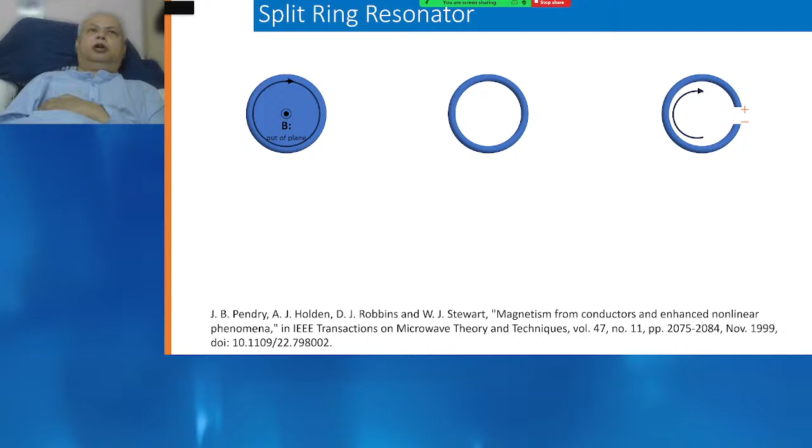Consider a conducting disk and apply a magnetic field out of plane from the disk. So the disk has a plane, and perpendicular to that plane is the applied magnetic field. If we apply a magnetic field in that direction, it will induce a circular current. Why? Because according to Lenz's law, the magnetic field will be opposed by this disk, by this conductor.

So it will oppose the external magnetic field, and there will be an induced circular current. Now this disk being a conductor, the current will be mostly at its edge, the outer side. The current does not penetrate into the conductor, so it is mostly on the outer side, the edge. Now this is basically a diamagnetic effect which is very weak, so it is weakly diamagnetic, mu is less than 1.

So this is not going to solve our purpose, but we'll develop on this next. Now, since current is on the outside, there is no point using the other portions of the metal or conductor, which will lead to higher conductor loss. So remove those portions where there is no current. Remove those portions, and effectively we get a ring confining the current. So we get a ring from the disk, at the edge of the current in the disk, which gives the same or similar response to the disk.

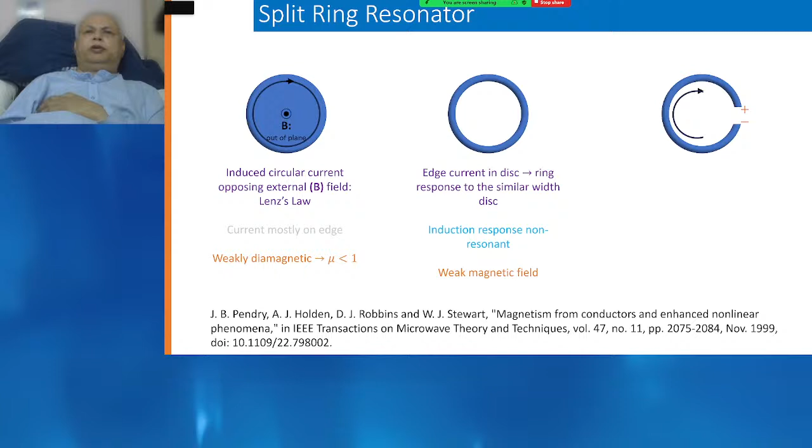Now here also the induction response is non-resonant. Since there is only an induction response, there cannot be any resonance. Again, it's a weak magnetic field.

Now to get resonance, we have to have a capacitive effect. So what we will do is cut the ring, make a small cut, not a large cut, a small cut. If we make a small cut, then across the cut there will be charges, positive on one side and negative on the other side. Therefore, there will be capacitance. If it is a large cut, then the capacitance will be small or negligible.

Why? Because C is equal to epsilon A by D. If you increase D, the cut size, C will be smaller, so that will be negligible. So make a small cut, so we get sufficient capacitance. The split introduces capacitance, and the metal, as usual, gives us the inductance. So we have inductance and capacitance, which means an LC circuit. The LC makes it resonant, with the resonant frequency omega 0 equal to 1 upon root over LC.

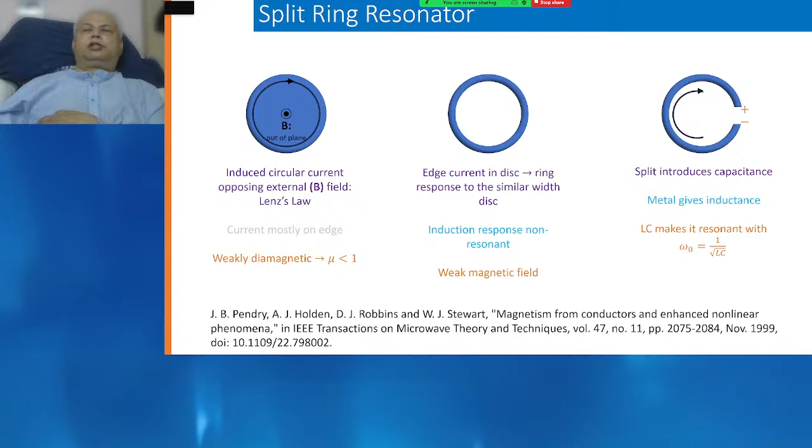Now on the left side, there is a problem. At the cut, we have a plus and minus charge separated by a small distance, acting like a dipole, like an antenna. The moment it acts like a strong dipole antenna, it will dominate and lose the magnetic response to a large extent. So that is to be taken care of.

To take care of that, we use another split ring in the opposite direction. The split is opposite to the split of the outer ring. So there are two dipoles on two rings, but in opposite directions, so the charge distribution is different. In the outer one, the upper side is positive; in the inner one, the upper side is negative. Since the charge distribution is different, they cancel out, and the antenna effect is cancelled.

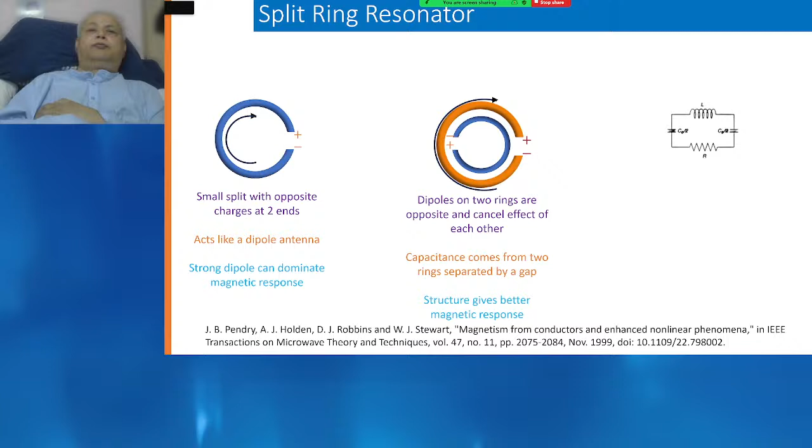Second point: there are two capacitances, coming from the two rings separated by a gap. This gives a better magnetic response. Ultimately, we arrive at this configuration which gives us better magnetic response.

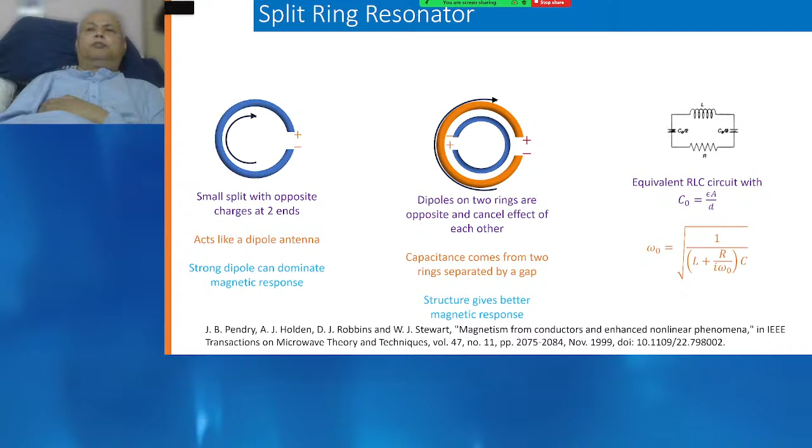If we look at the equivalent circuit, we have L, then two capacitances, then R, because we are using a conductor which has resistance. So we have an equivalent RLC circuit for which omega 0 will be the root over of 1 upon L plus R by j omega into C. So accordingly you can find that.

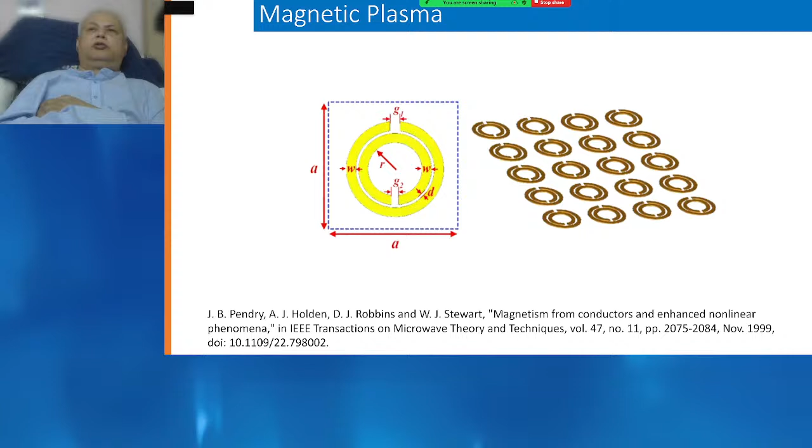Now that can be arranged in periodic fashion to get magnetic plasma. So now we get magnetic plasma by arranging them periodically, as in the case of the rod. You can use Lorentz law or Drude law to find out how mu will vary with frequency.

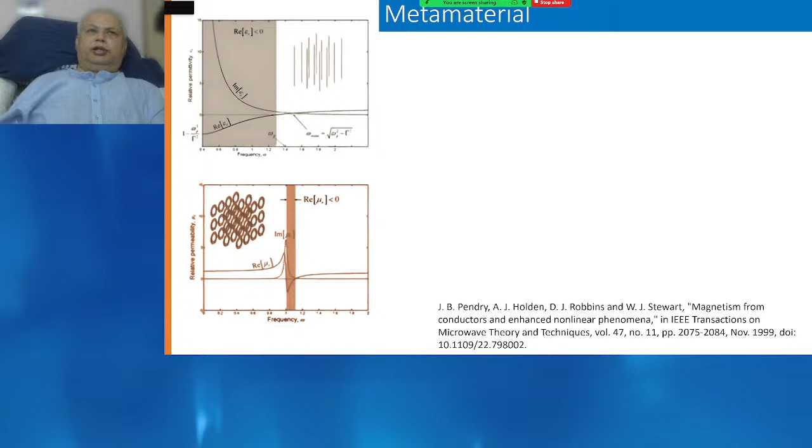Now, how to get a metamaterial? Metamaterial has mu negative and epsilon negative. So first generate the negative epsilon, then generate the negative mu. Epsilon and mu are negative over certain ranges of frequency, and there will be a band of frequency where there is an overlap of negative permittivity and negative permeability. Choose that region, and add these two. If we add them, we get a region where both are negative, epsilon negative and mu negative. There we get negative refractive index, or metamaterial. This is the practical realization of metamaterial.

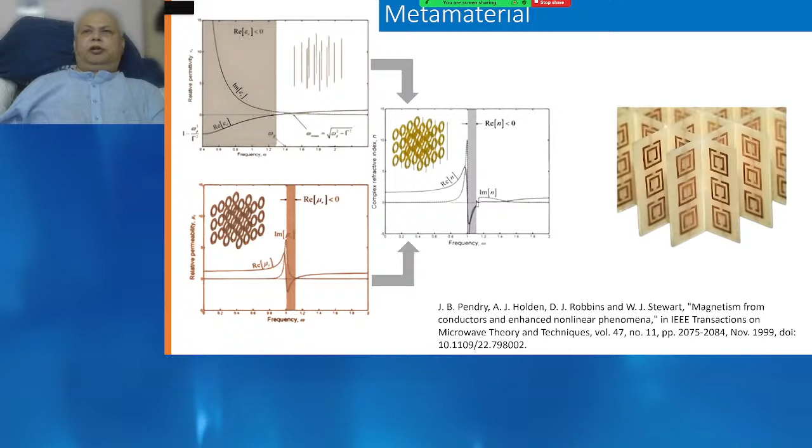Now, what are some of the applications? Because that is the main focus today. First, if you use metamaterials, the Doppler effect gets reversed, which means if the source is approaching you, instead of the frequency increasing, the frequency will decrease.

For example, suppose you are in a war and your plane is going into the enemy zone, and your plane has metamaterial on its surface. When it goes into the enemy zone, the radar will see that the plane is going away, because the frequency has decreased due to Doppler effect reversal. It will feel as if the plane is going away from the enemy zone, so it will be difficult to detect it.

Then the Goos-Hänchen effect is reversed, which means normally, the point where you incident the light or electromagnetic field is the point from which it gets reflected — that is the usual RHM phenomenon. But in this case, the reflected beam will be shifted from the point of the incident beam. From where the incident beam is incidented, from that point it will be shifted. That is called the Goos-Hänchen effect.

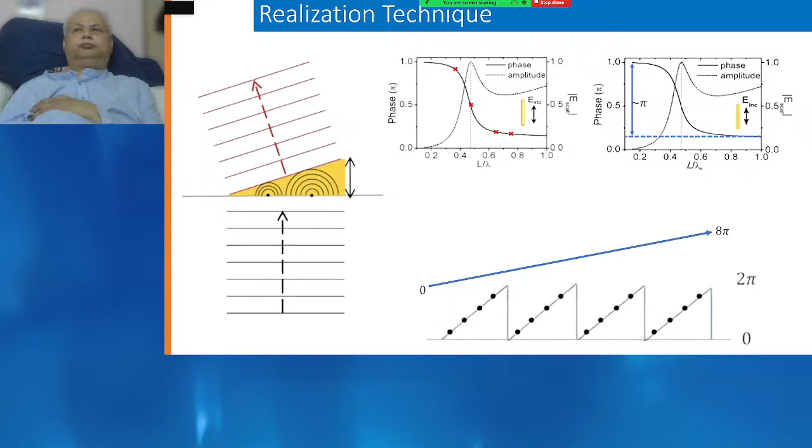Now we are going to use the principle of reflection. Some principles we should always remember regarding reflection: suppose there is a reflection between two dielectric interfaces, then the reflected beam will be either in phase or out of phase, that is 0 or pi, with the incident beam. If the first medium's dielectric constant is less than the second medium's, then the phase is pi. If the first medium's dielectric constant is more than the second medium's, then it will be 0.

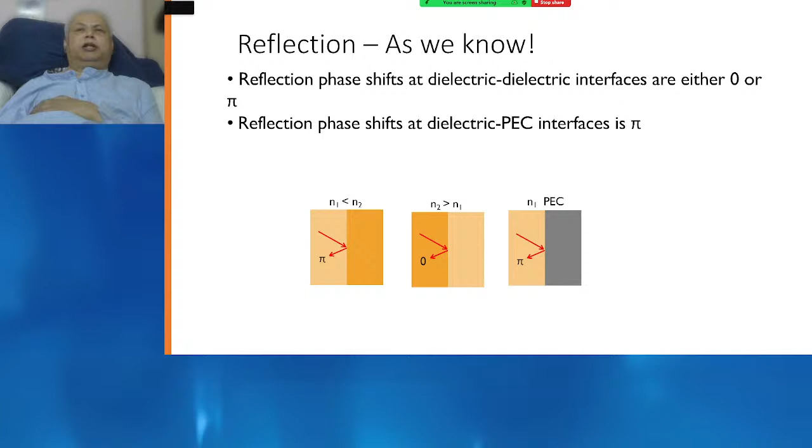But if you go to a PEC, a perfect electric conductor, the reflected phase is always pi. And in between these two cases, there are lossy materials.

In the lossy material, the reflection phase can always be anywhere between 0 to 2 pi. So if we use lossy material, which is the case we are going to use, we can realize any value between 0 to 2 pi.

If you require pure pi, what can you do? If you require pure 0, what can you do? And we have seen that between 0 to 2 pi, any value can be achieved. For that, we require lossy material.

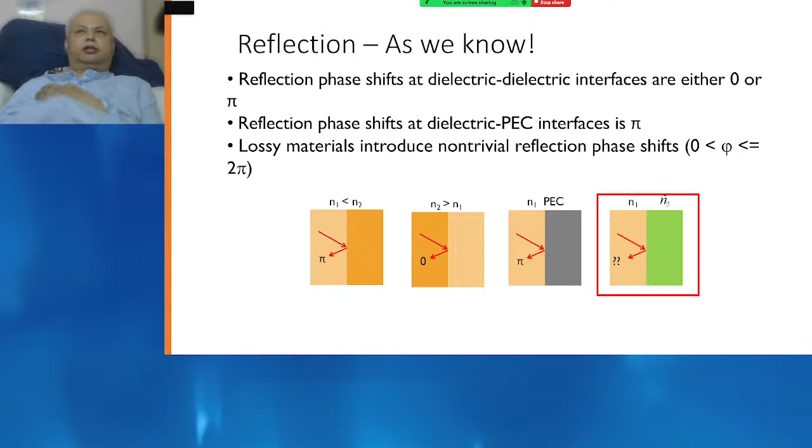Now let us remember the generalized Snell's law that we discussed yesterday. The normal Snell's law is n2 sin theta t equals n1 sin theta i, where t and i are for transmitted and incident waves. The generalized Snell's law concerns what happens at the boundary between the two dielectrics, where we have given a gradient phase. If the phase is zero, then n2 sin theta t minus n1 sin theta i equals zero, meaning the discontinuity is zero, there is no phase discontinuity.

But if there is a phase discontinuity, then this will be proportional to the phase discontinuity. The left hand side is a unitless quantity, while the right hand side is proportional to the gradient of phi, the phase gradient, but the phase gradient has a unit, so its inverse is 1 by k0. Therefore for the constant, we take 1 by k0. This gives us the generalized Snell's law.

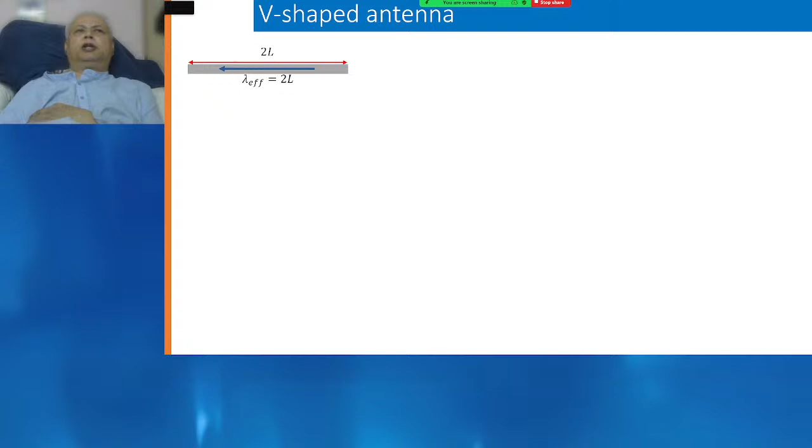We discussed this yesterday too, so let me go into slightly more detail. Suppose we want a frequency or effective length of a linear antenna, so we take the antenna effective length to be 2L, meaning lambda effective corresponds to effective length 2L. In that, on the left hand side suppose we have negative charges accumulated, and on the right hand side we have positive charges accumulated, so the arrow from positive to negative shows the electric field.

Now there can be another case where in this mode there is positive charge on both sides and negative charges as well, so from positive to negative we have the electric field, and from positive to negative is L distance. That is lambda effective, so that will be equal to L. So we have the same length, but there we can generate two frequencies or two wavelengths.

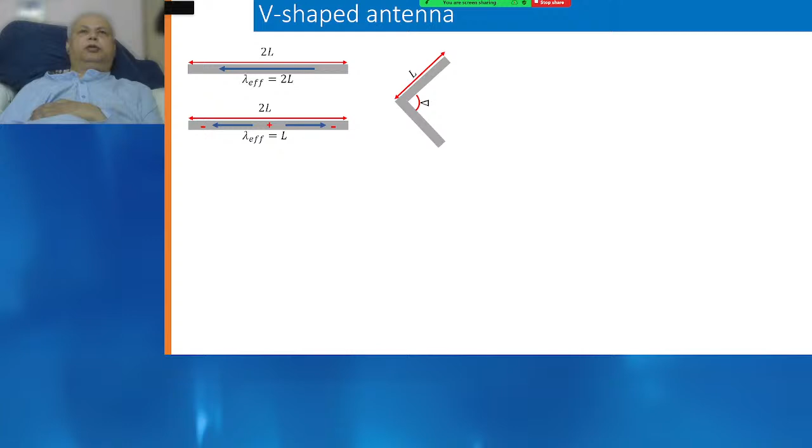Now to realize this in the form of an antenna, what we usually do is fold it from the center. So take the 2L length, then fold it from the center, and you get a V-shaped antenna. That is what we discussed yesterday about the V-shaped antenna.

This part we discussed yesterday, so I am leaving it out except this next portion. Electric field, what will be symmetric, what will be vertical, that we have discussed. This I have discussed next.

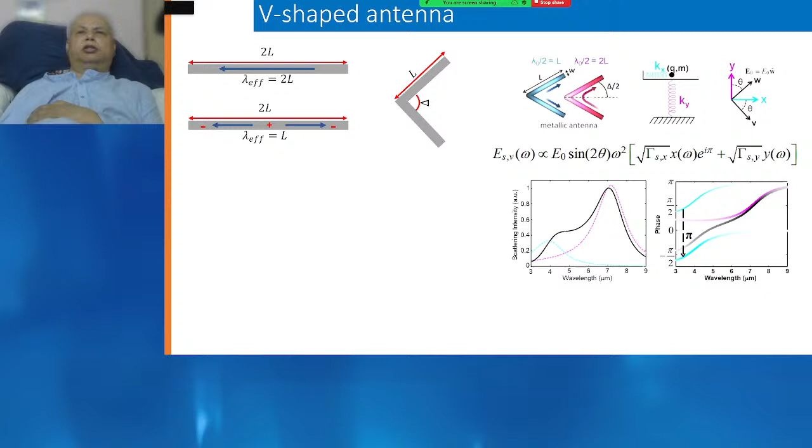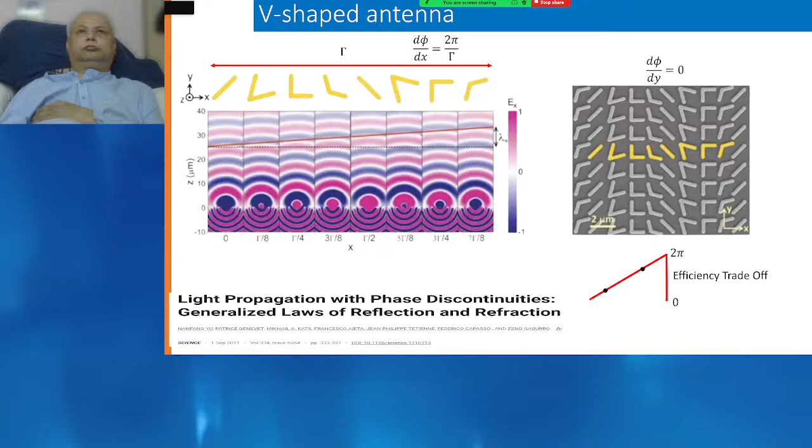Now comes the efficiency trade-off. Ideally, what we require is that the phase change or phase gradient should be continuous. But we are putting antennas at discrete places, separated from each other. If you want continuous phase, the antennas should overlap each other, and in that case you get nothing, because the antennas overlap and the same phase is repeated at one point. There can be 5 phases, so that is of no use. So depending on the space available and the gradient required, you have to decide the number of antennas that can fit within that space, which is difficult because if you reduce the number of antennas, the efficiency goes down.

So here we are using 8 antennas. In the top example, we use 8 antennas, which gives a very good result. If instead of 8 we use only 4 antennas because the space is limited, the result will not be as good, so efficiency goes down. So depending on the available space and arrangement of antennas or structures in its cells, we can have better or lesser efficiency.

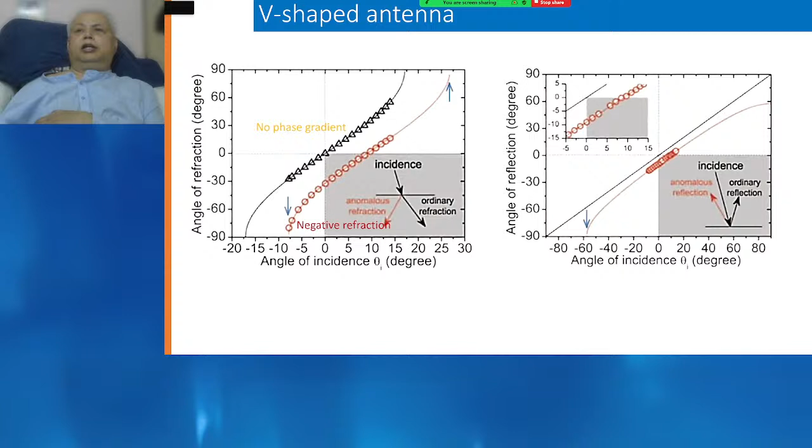But if you give this phase gradient, the red curve shows what happens. The negative refraction is clear, the anomalous refraction is clear, because it is below the black curve, meaning negative refraction. Similarly here it is below the black curve, meaning negative reflection.

With this information, now we'll come to the synthesis of the meta element. Instead of V antenna, what other shapes can there be? I will confine myself to the shapes that we discussed or designed in our laboratory.

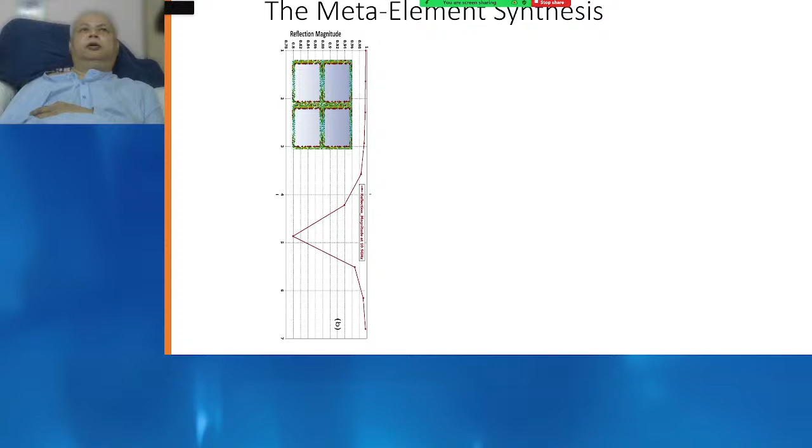Look at the leftmost part. What we see is a ring, like a ring antenna. Near it is an array of ring antennas, 4 ring antennas in an array. What we are considering here is the reflection phase for the ring antenna. You can see it is between 150 and minus 150, so about a 300-degree phase shift is possible with the ring antenna.

For the magnitude, you can see it is mostly above 0.707. Here, when you take the array, it is above 0.78. So this is a good candidate. 0.707 means the half-power level is accepted and applicable here, so half the power is lost.

Maximum half the power is lost, but mostly it is above 0.98, except for a small zone where you have the dip. Similarly, for the second, we have a cross, then array of cross, similar results.

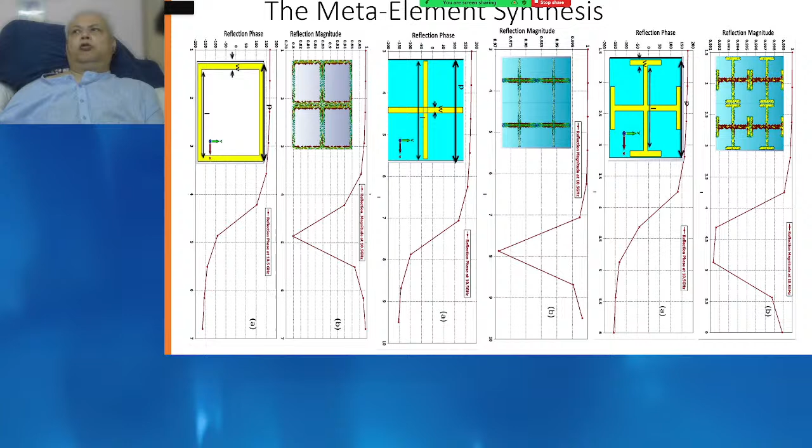Then we have a Jerusalem cross, an array of Jerusalem cross, almost similar results. So any of these one can use as the meta element, including the V, but depending on your requirement, you can use any of these. What we did is consider this, then we developed our own structure, which we called a modified Jerusalem cross, which looks like this. The inside figure that you can see in the top left side is the Jerusalem cross.

If you look at it, the phase variation is from 150 to minus 150 for different angles. Phi is equal to 0, 15, and 25 for different angles, but the variation is same. Only variation remains same, although angles are different. And the amplitude, if you look at the amplitude, is above 0.98.

So magnitude of reflection is above 0.98 for this structure. And the current distribution, you can see mostly the current is distributed inside the ring. So this is basically the Jerusalem cross, which is modified. What we do is we take a ring, and on the ring, at the center of each arm of the ring, we put a T. So that gives you a Jerusalem cross type of thing. And the maximum current is always at the center of the ring.

At different angles in the top left, but for different frequencies also we saw that the reflection phase variation is from minus 180 to about 175. So almost 360 variation, 300 to 360, 350 to 360 phase variation is achievable. We can achieve that much of phase variation. Reflection magnitude, there is no problem, it is everywhere above 0.95. So this is an excellent structure that we adopted for our research. All the work that we did, we adopted this structure completely throughout our work.

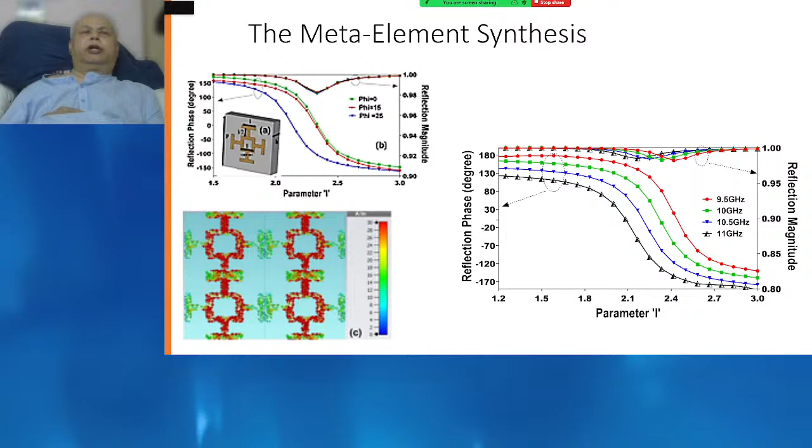Now let us use that structure. Why will we use that structure, for what are we going to use that structure? First thing is we will go for a flat lens. That was the question, the lens was the question in case of the metamaterial. So in the metamaterial, we designed a lens, but it is a thick lens. Instead of a thick 3D lens, we have to go for a planar lens. For the planar lens, what is to be done? From the surface, it is to be focused. We have to focus it.

Now what we did is we started fabricating a surface, designing a surface onto which we will incident normal waves. If you incident a normal electromagnetic wave, you expect that the reflection will come back in the normal direction. If the incident is in the normal direction, usually it should come back in the normal direction. But we do not want that. We incident in the normal direction, but the reflected wave is not in the normal direction. It has to be in some other direction. Now we have seen from the wedge, the principle of wedge, that from high phase to low phase, the tilt has to be from high phase to low phase.

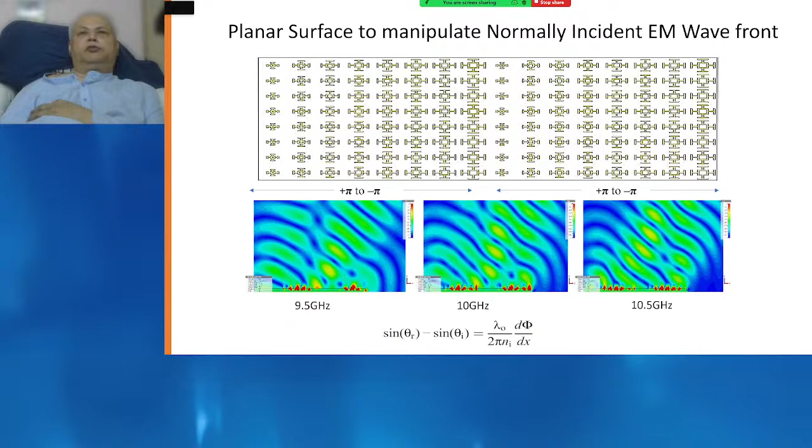Here also the same thing happens. They are coming and converging to the focus point.

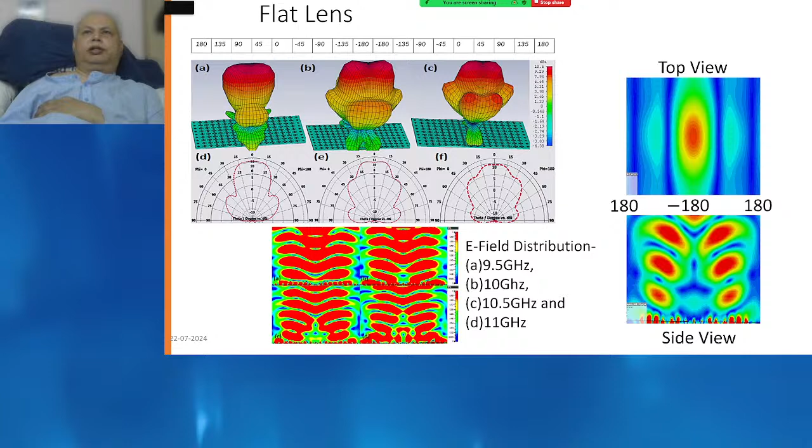Next. Then give me a minute.

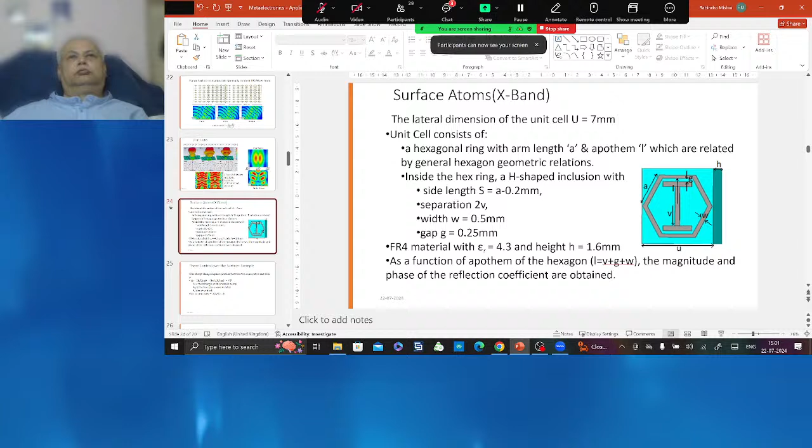Okay, now we will consider another structure.

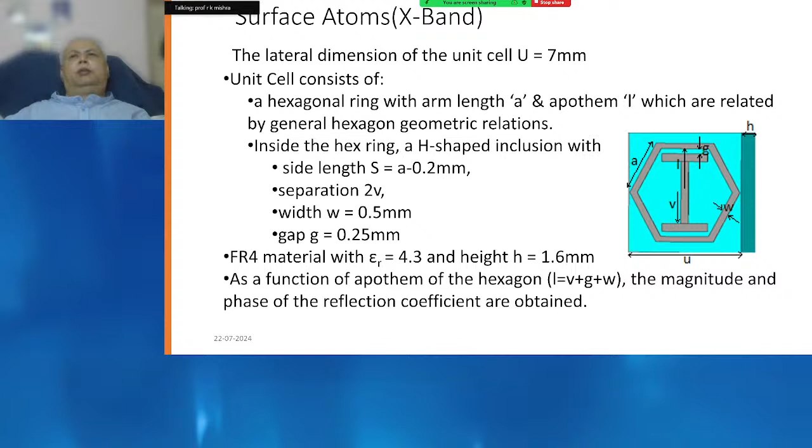In this structure, we have taken a hexagon, and within the hexagon we have put an H. The dimensions are given here: unit cell dimension U, or what we called earlier A, is 7 millimeters. The unit cell contains a hexagonal ring. Arm length is A, apothem is L. They are related by the hexagonal geometric relation.

Inside the hexagonal ring, there is an H-shaped inclusion. Side length is S, which is A minus 0.2 millimeter. Separation is 2V. Width is 0.5 mm. Gap is 0.25 mm. We used FR4 material for which epsilon r is 4.2 to 4.3, and thickness of the material is 1.6.

As a function of apothem of the hexagon, L is actually equal to V plus G plus W. The magnitude and phase of the reflection coefficients are obtained.

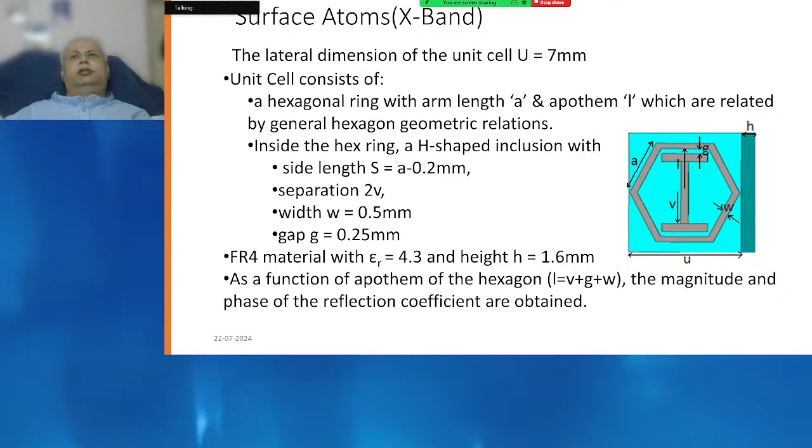Now, once you distribute this structure over the surface, let's say we want the phase change or phase gradient between two consecutive cells. How do we find that? D phi is equal to 2 k0 u sin theta. So depending on what your theta is, and what u and k0 are, you will find out what d phi is.

If you put those values, that gives you 43 degrees. Theta is the tilt angle of the metallic bump that we will discuss later, but theta is just an angle. K0 is the free space wave number. U is the size of the unit cell.

For the metallic bump, what we'll see is we take a ground plane, and on that ground plane we put a metallic bump. The metallic bump is like a triangle or a trapezoid put on the ground plane, and the trapezoid makes an angle theta with the ground plane. Based on that, we design this.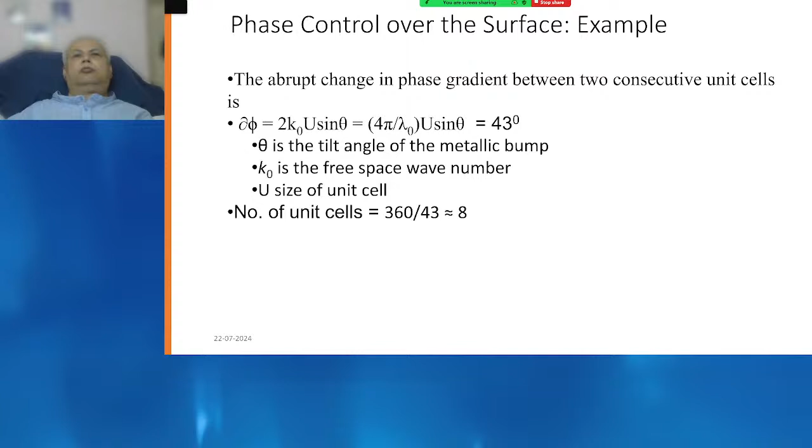So 43 degrees is d phi. Now we require the total to be a 360-degree phase shift, so 360 divided by 43 is equal to 8. So you require 8 number of unit cells over the bump. At least 8 number of unit cells, or more than 8, is good — at least we should have 8 unit cells.

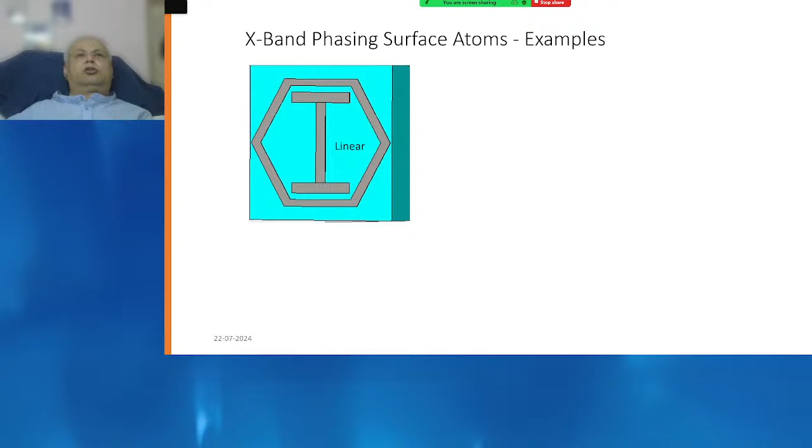Next. Now, if you have a linearly polarized electromagnetic field, this is the structure that we'll use.

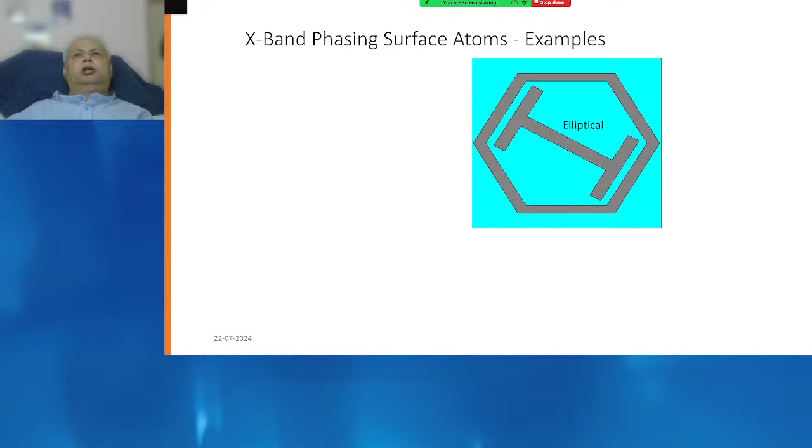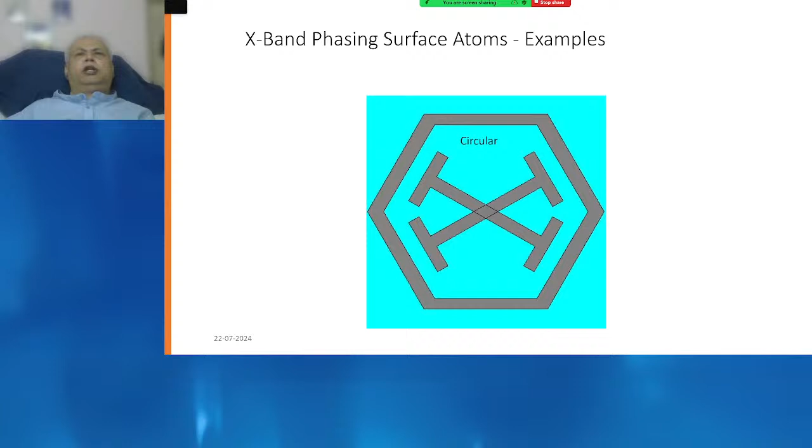If we have an elliptically polarized field, this is the structure that we'll use. And if we have a circularly polarized electric field, this is the structure that we are going to use. So these are the three structures we use depending on the polarization of the electric field.

Now, this shows for these three structures — circular polarization, linear polarization, and elliptical polarization — once you make the surface, the phase and amplitude resonance responses for each structure are shown here. It varies from 150 to about 200, close to 350 to 360 degree variation in phase, and the amplitude is above 0.99, which is definitely acceptable.

So if you design a surface with this, that is acceptable. That surface, I will tell you where we are using it — I will show you that later.

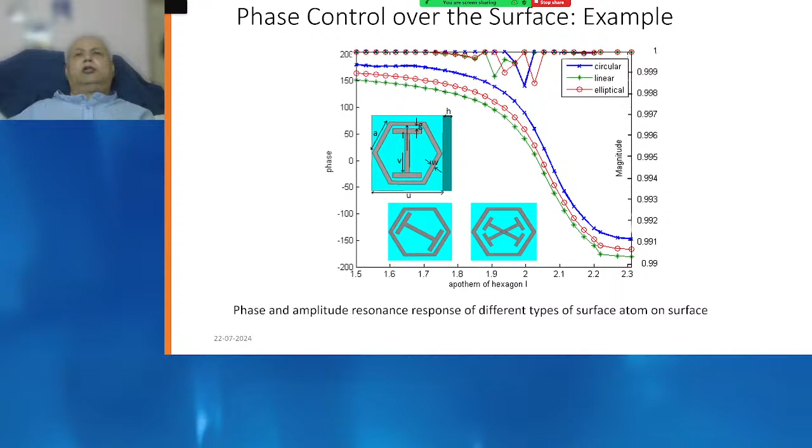That surface we use actually in carpet cloak. We'll start with carpet cloak first, then we'll come to using that surface. In the carpet cloak, it means you have to hide something. Something is to be hidden.

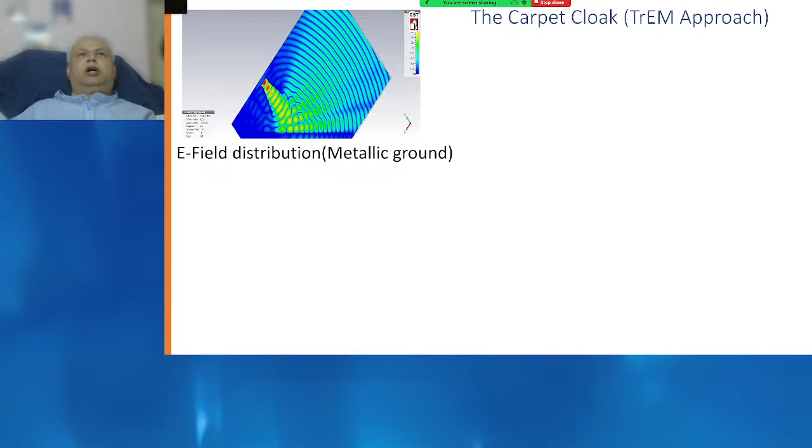Suppose you have your aeroplanes, fighter planes, at some location which you do not want your enemy to find out. On those fighter planes, before the fight, if there is absence of fighter planes, you will have a plain ground. It will act like a metal. Ground usually acts like a metal. So you will have a plain ground.

If your enemy incidents electric field onto the plain ground, where you have the planes, if there are absence of planes it should get normal reflection. So the field distribution will be like this. This field distribution they will observe.

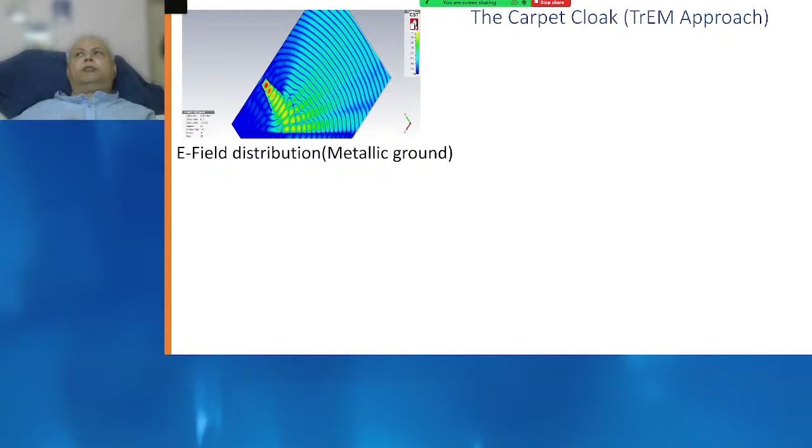Now suppose you have the plane, it will be like a bump on the ground. This white space is a bump. One plane is there, or one hangar is there to contain the plane. So if you have the hangar there and your enemy incidents electromagnetic field onto that hangar, the reflected field will be scattered in all possible directions in the reflection direction. All possible scattering will be there. So from that, the enemy will know that we have a hangar there, so there is a possibility of an aeroplane.

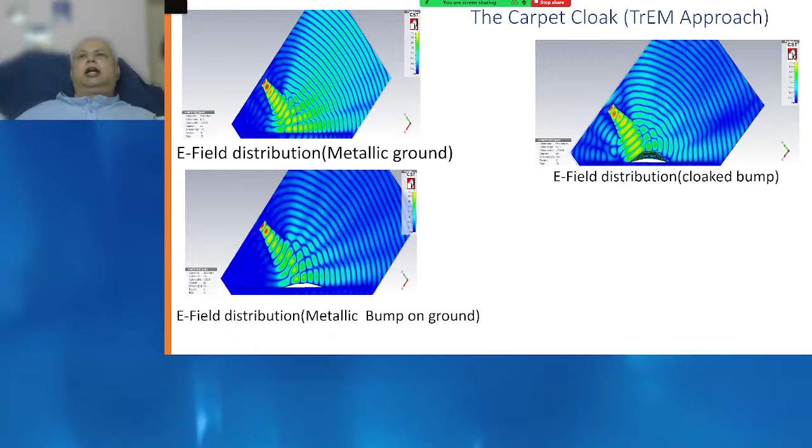This is one of the applications. But the problem here is if you put metamaterial, it will be so bulky, so large, that its weight will be very large and very high. So the hangar may not be able to withstand that weight. That is the problem.

Now instead of using that bump, we are proposing to use this hexagonal distribution on one plane. And the plane is in the form of a bump, so that will cover the bump. The plane will cover the bump. The electric field distribution you can see. Based on this electric field distribution, there will again be reflections.

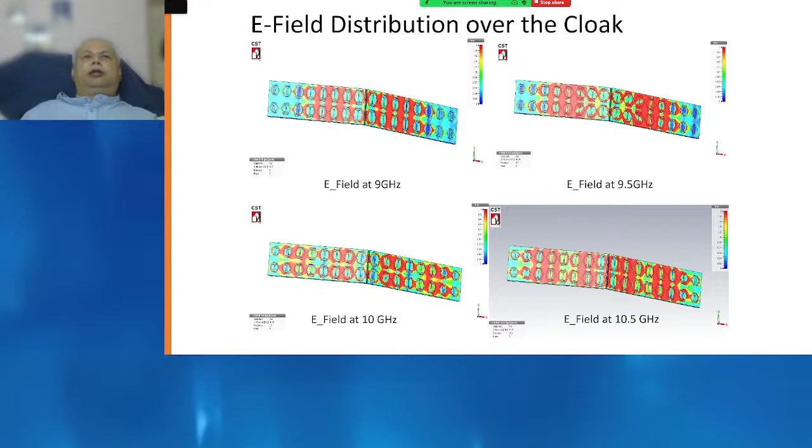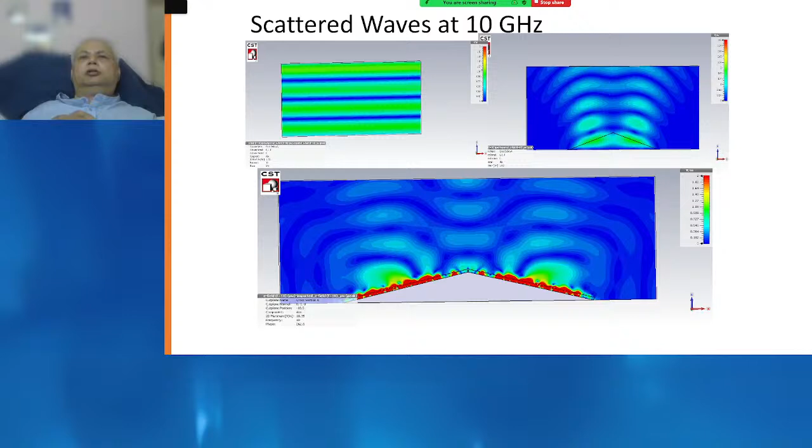This is at 9 gigahertz, then this is at 9.5 gigahertz. This is at 10 gigahertz. As you increase the frequency, it is more like a straight line going up. At lower frequency, small discrepancies are there. At high frequency, it goes as if it is going up in a parallel direction.

At 10.5 gigahertz, this shows all four taken together at one point. So the best result is at 10 to 10.5 gigahertz. So depending on what the frequency is, we have to design the carpet, the hexagon size, etc. accordingly.

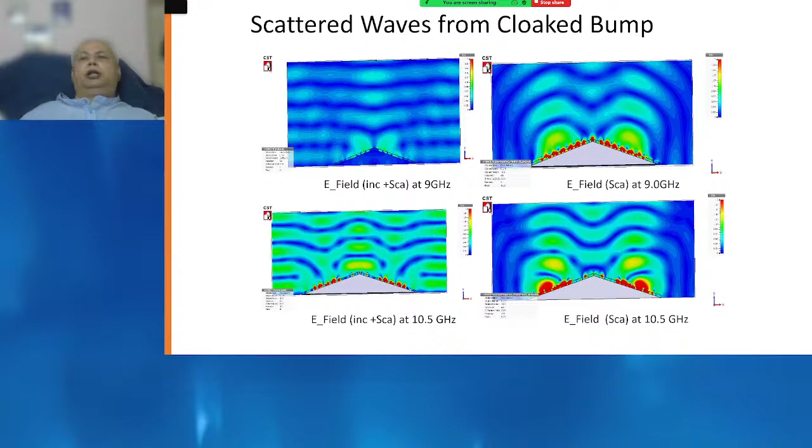This shows the scattering from the bump. You can see the scattering. Top left shows you the electric field of the incident and scattered electric field taken together at 9 gigahertz. Top right shows you the scattered field only. Similarly, at 10.5 gigahertz, incident and scattered field as on the left.

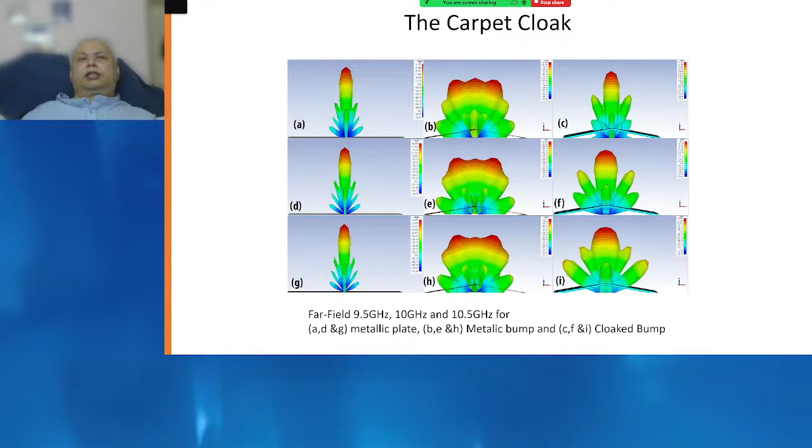Now, those are the simulations, but in practice we see the far field. So here are these fields. In A, D, and G, these are from the metallic plate. If you have a metallic plate, the reflection at 9.5, 10, and 10.5 gigahertz is shown in A, D, and G. This is going upward in the vertical direction; the beam direction is vertical. Now, when the metallic bump is there, it gets spread. Instead of pure vertical, it gets spread out. Now, when you have the bump and the cloak on the bump, then again the spreading is limited. It goes down, it gets limited. That is what we see here.

This is another thing, creating beams with arbitrary polarization. So you create beams from a surface with different polarization. What we do is we take two units, unit 1 and unit 2. Unit 1 is a row, unit 2 is also a row. Unit A, unit B. Two rows, they are laterally shifted.

So the two rows of elements in the unit cell will create two orthogonal polarization components with 90-degree phase difference, because this lateral shift is such that between the first row and second row, the phase difference between the first elements is 90 degrees. We ensure that psi is 90 degrees. So the phase difference is 90 degrees.

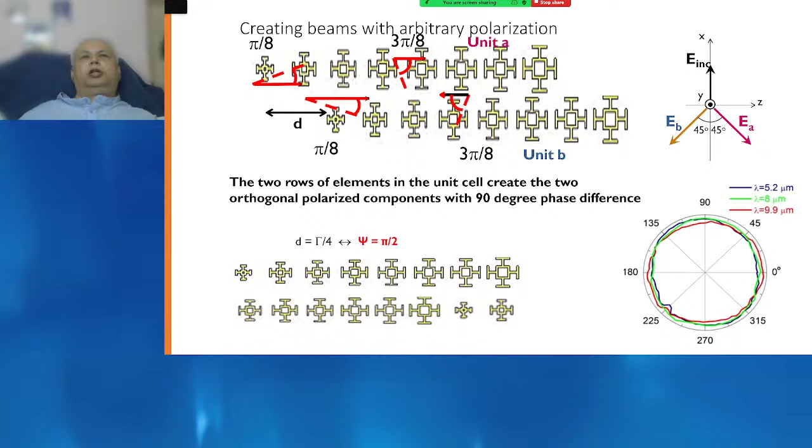So the polarized wave that you get is linearly polarized, but with different phase. Since the phases are different, what you can do is send two different phases. You send two pieces of information with two different phases. So there will be no interference, using the same frequency, but because of the arbitrary polarization and phase difference, you can send more information at the same frequency by arranging this structure.

Then we'll come to the enhancement of gain. Conventionally we consider a parabola. At the focus of the parabola we keep a horn, and from the horn we incident onto the parabola. They get reflected and converge, increasing the gain.

Instead of that, what we'll do now is use a planar surface instead of the parabola. On a substrate there is a ground plane, and on the substrate there are antenna elements distributed in such a manner that their phase will resemble the phase reflected from different points on the parabola. So the parabola is effectively replaced.

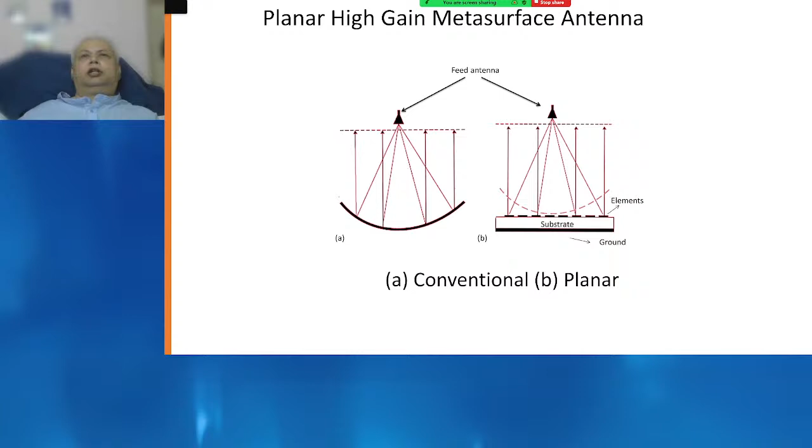Here what we have done is quantize the phase, from 180 to minus 180 degrees, into different quantum numbers. Then we arrange that on a circular ring, a circular patch. Consider a circular surface. On that surface, you divide into different rings, and each ring will correspond to one phase. Distribute the elements on each ring.

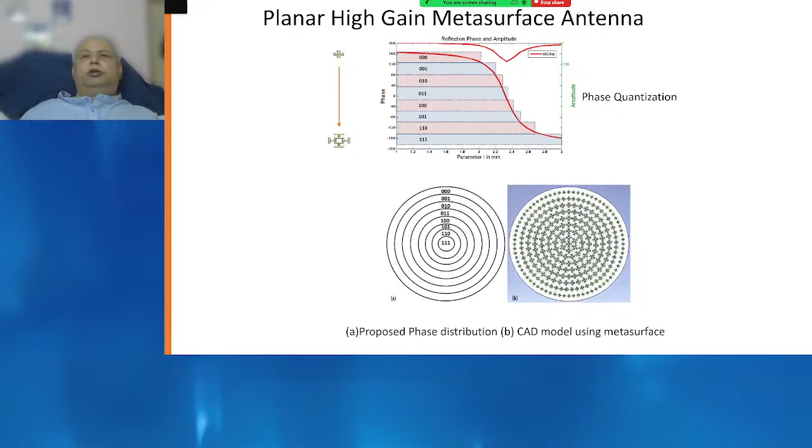That is shown on the left side, the quantized phase, and on the right side we show the arrangement of rings, the practical arrangement of the rings.

You can see if you take the measurement of the S parameter with the ring and with a normal antenna, the matching will not be as good compared to the antenna with this surface. So if you put an antenna on this surface, that will give you better matching, S11 will be better.

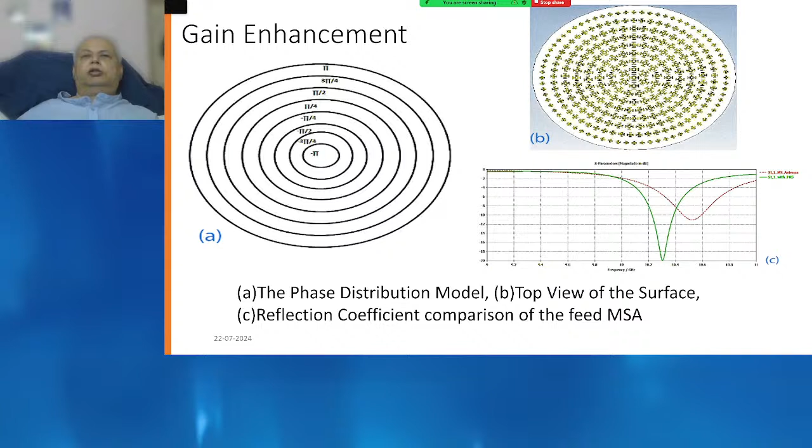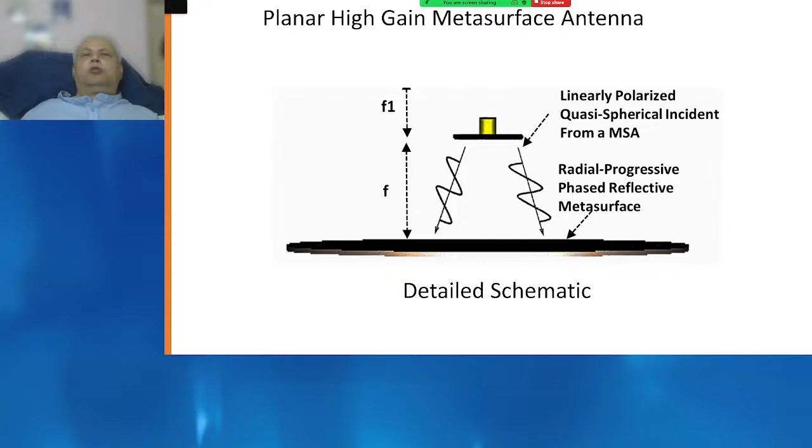Now you will use that principle to get a high-gain metasurface antenna. What we do is take that ring plate at the bottom. Above that, put a microstrip antenna. From the microstrip antenna, illuminate that bottom plate. So the reflection from the bottom plate will be converging, and that is how the gain will increase.

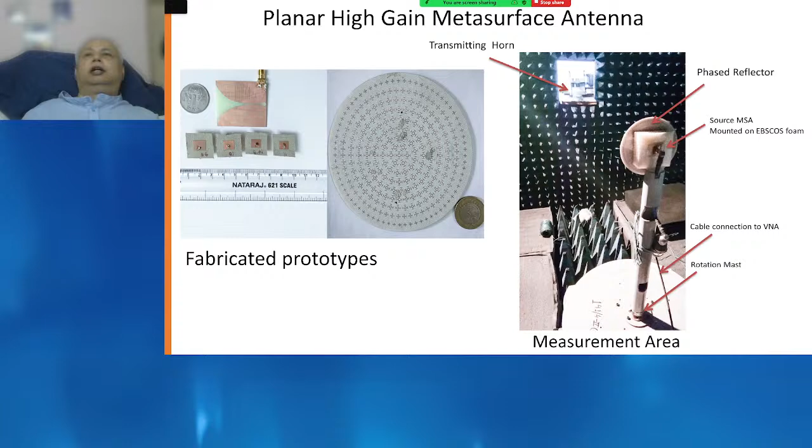It shows the practical, designed antenna. The top antenna is on the left side, the middle is the designed antenna, and the right side is the experimental arrangement, the measurement that we have done.

Once we were able to generate a high gain, we thought let us use this high gain antenna to generate a circularly polarized antenna. So what we did is we took the high gain antenna as it is, then above that we put a metasurface capable of converting linear polarization to circular polarization. So another metasurface was used above the antenna, and that converted the linearly polarized wave to a circularly polarized wave.

Now for that metasurface design, we knew how to get circular polarization from a microstrip antenna. Take a square microstrip antenna, cut its two opposite corners, making small cuts. Same principle is used here for rings. Instead of the microstrip antenna, we put it inside a circular ring, and we use it as if we are cutting the corner of an antenna.

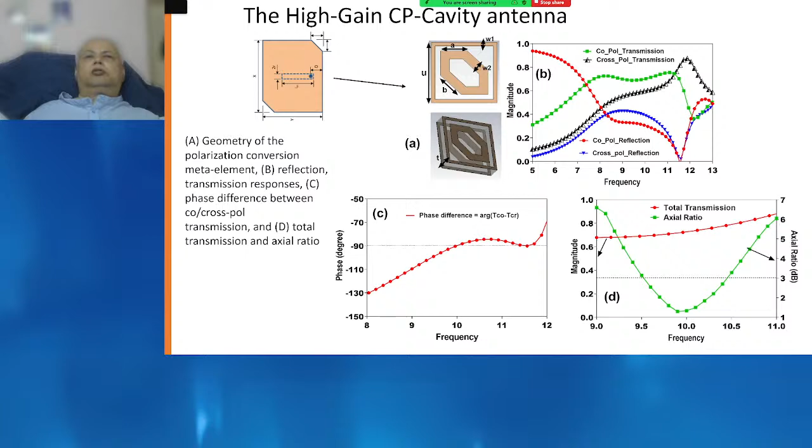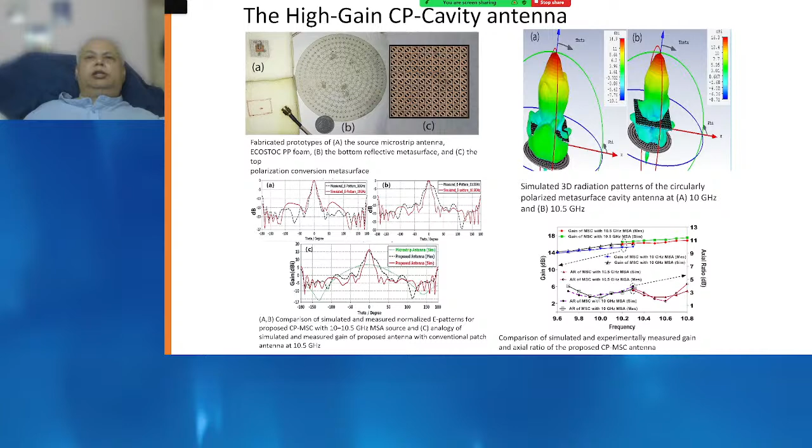Then once we got that, we thought that there are situations where you require the information to be sent in different, multiple directions. So we thought, let us send it in four directions. I'll show you the application, but we thought let us change the direction of the antenna beam. Instead of having one main beam, let us have at least four main beams. So we thought of a quad beam antenna, four beams.

We generated that. Then, once we were successful with that, we thought why not use circular polarization also? Generate four beams, and above that put a linear to circular polarizer at the top of the antenna. So that is what we did. We put a linear to circular polarizer.

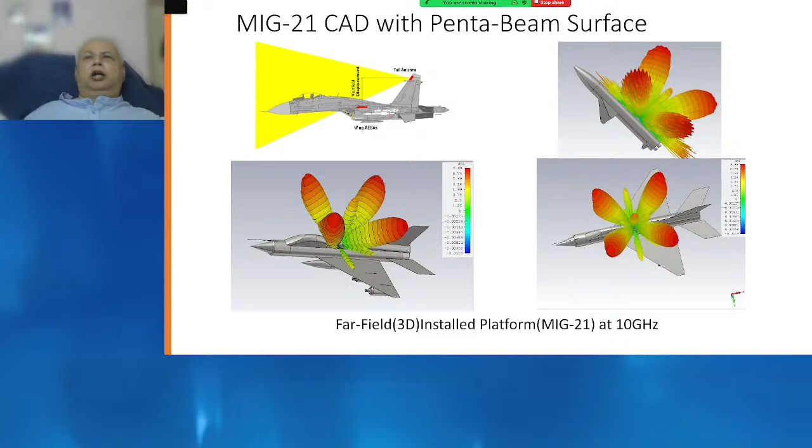Next, the next thing is to reduce the radar cross section. Why do we want to reduce the radar cross section? Because if you are flying a plane or sending a missile to an enemy location, they will capture you by considering the radar cross section. Each plane, each structure, electromagnetically has a particular radar cross section signature.

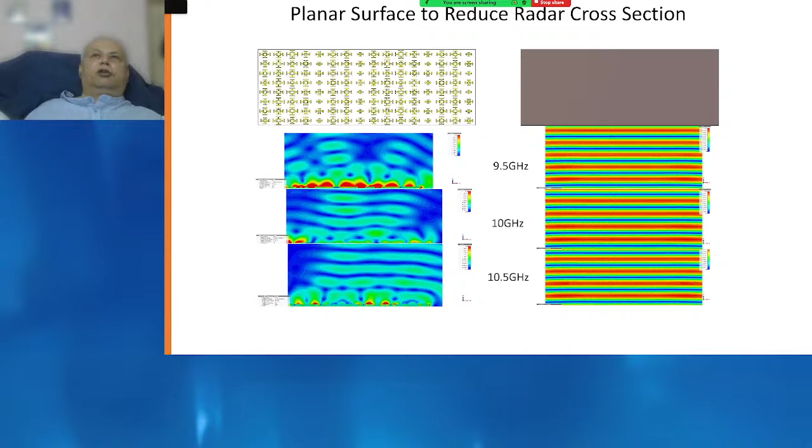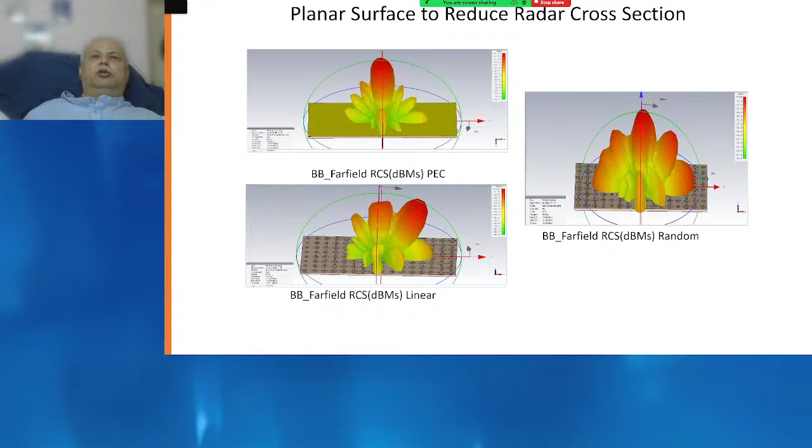This shows the same thing from the field point of view, with the radiation pattern. You can see the sharp radiation pattern for the perfect electric conductor, top left. If you have a linear distribution, the sharpness goes down, but it is still sharp in one direction. But when you come to random distribution of the elements, it is scattered in all directions. At different times you get different amounts of energy, so you cannot determine what the surface is. The exact surface will be very difficult to find out — there will be no constant signature to determine the surface.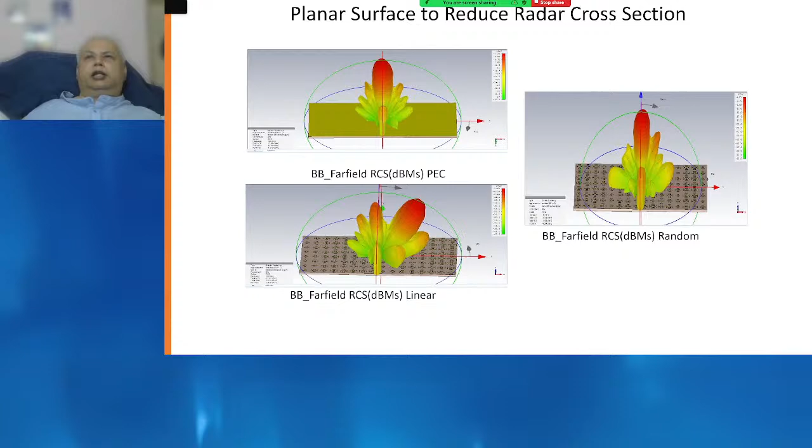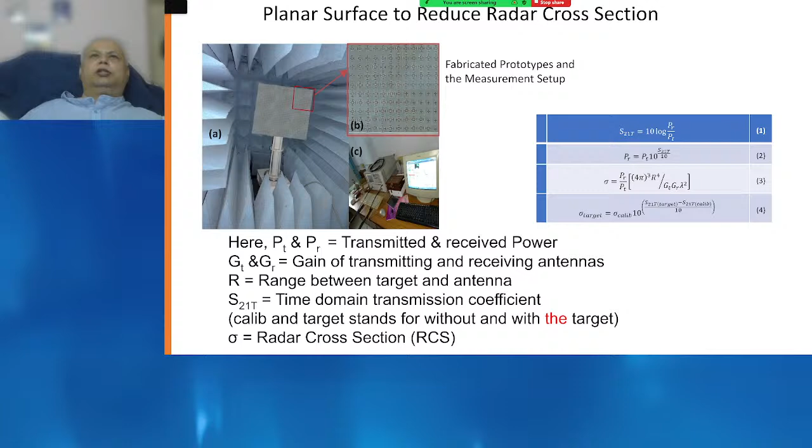This shows the radar cross section reduction measurement setup. I think I will skip how to do the measurement, since we only have 2 or 3 minutes more.

This is from the measured results. The RCS reduction you can see ranges from 20 to 10 dB — minimum 10 dB, maximum 20 dB reduction — and that can be achieved using random distribution of the unit cells on the surface.

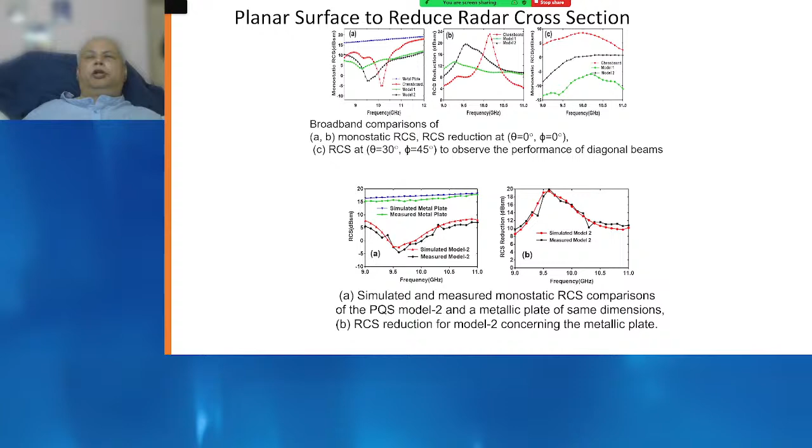Next, there is the planar supercell configuration. In this, we consider three supercells. The first is called the checkerboard or chessboard type of distribution, with phase 0,1,0,1,0,1,1,0,1,1,0,1,0. So this way you have the first distribution, and you can also see the second and third distributions. According to these phase distributions, the placement of elements is in the bottom row.

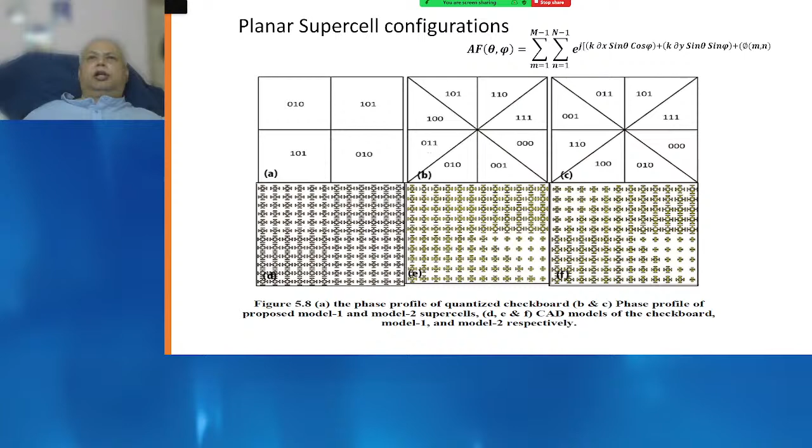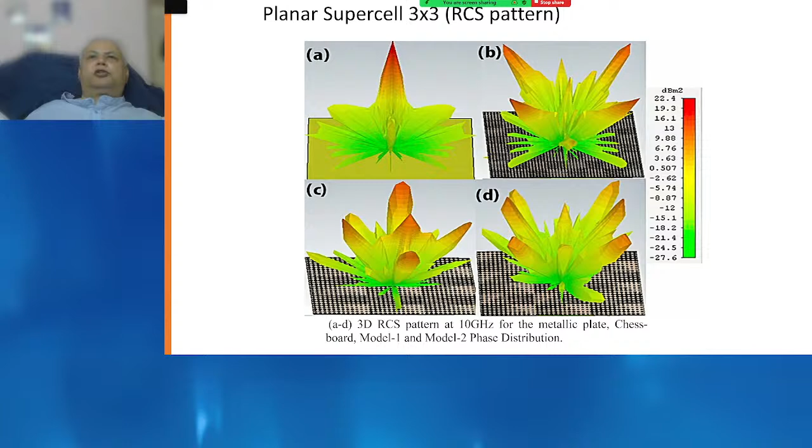Now with those placements, you can see what happens to the radar cross section. These are completely scattered, so if you go for that type of distribution, there is complete scattering and no possibility of detecting the object. This was the animation, so I'll skip it — no possibility of detecting any object in this.